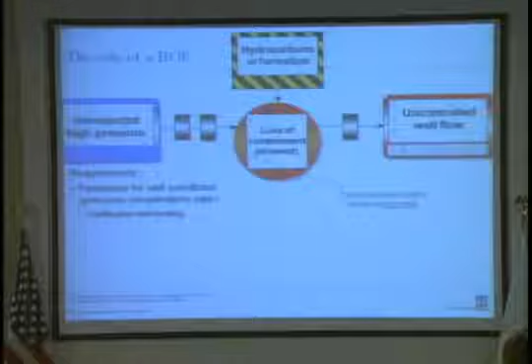In this particular role, and this echoes a lot with what Dr. Hunter was saying in terms of its functionality, what are the requirements in this particular role? Well, for one thing, it has to be functional for the well conditions. So it has to be able to handle the pressure and the temperature and whatever you happen to have in the wellbore at the time, what kind of pipe, what size, diameter, etc.

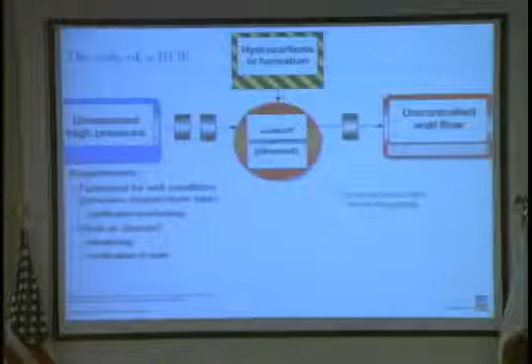And how do you make sure that something like this works? Well, you have to have verification and testing, and a panel later on will be talking about that very subject. It has to work on demand. It sits there for a long time doing absolutely nothing for the most part, and that's kind of what you hope, that you never have to really use it, but when you need it, it has to work on demand.

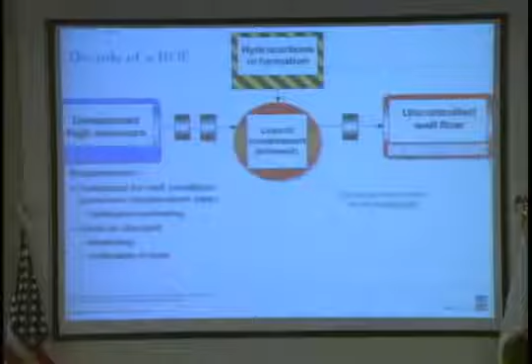That means that we have to have monitoring of it, give it a constant monitoring system. We know what its health is. We have to understand what state it's in. And again, Dr. Hunter was saying, the questions we couldn't answer. Is it closed? Is it open? Is it locked? We didn't know. We have to have a way of verifying what that state is.

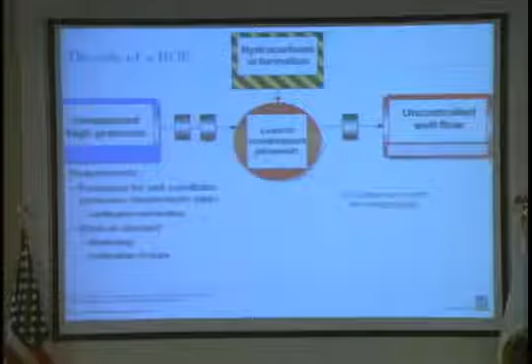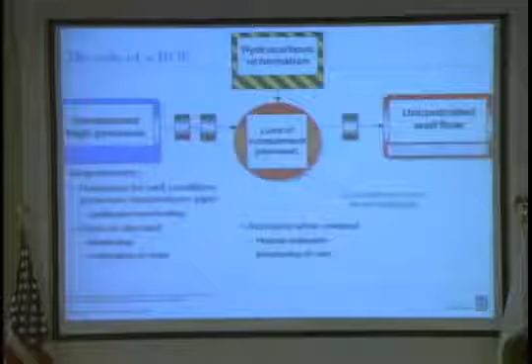It has to be activated when needed. And this goes back to what Deputy Assistant Secretary Smith was saying. There's a person involved in all of this. And there are human elements to the use of this. And people have to know when to use this at the right time. And that includes being able to monitor the well much better so you know when is the right time to do this. And the Sperry Sun data, as you saw, was quite confusing.

And then lastly, there has to be a continuous learning process on this as well, which means that we need to come up with a robust system by which we register not only the failures, which we've typically seen, we need to register the near misses, and we need to register the successes. When does this work? When we asked it to work. That was a success. Let's start a database on all of this, if you will, so we can collect this information and understand just exactly how successful we are with the use of BOPs.

Now, if we then move over to the right-hand side of the bow tie, we can also talk about the BOP playing a role over there. So the top event has already occurred. Now we're expecting the BOP to act as a barrier to basically prevent escalation to a much larger unwanted consequence. But we would argue that this is no longer blowout prevention, because typically we talk about barriers on the left side as being preventative and on the right side as being mitigating.

So we would argue that it is now called a blowout arrestor. It now has to stop or arrest the blowout, not prevent it. It's too late now, the blowout has occurred. Now you want it to take a completely different role. In this case, the requirements change. So again, we have pressure and temperature. We have the question, what's in the well?

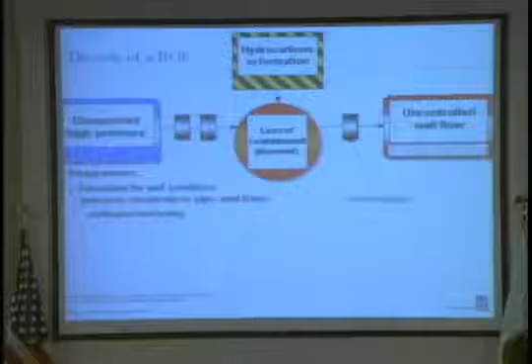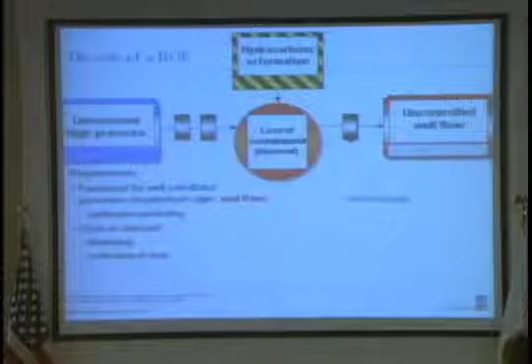Now we have flow. Now we potentially have a well flowing through the BOP stack and the demands that it function there. But again, it's verification and testing that's needed to prove that this is what it's going to do. It still has to work on demand. There still has to be monitoring, a verification of state. Activation when needed. The question mark comes up on human elements.

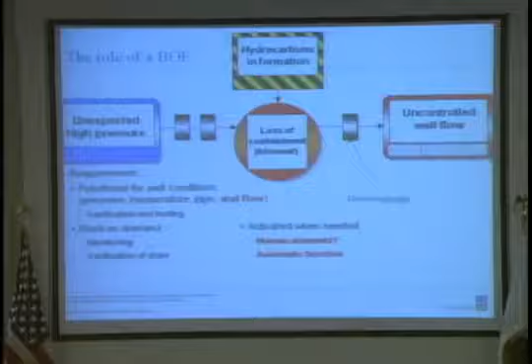As we saw in Macondo, suddenly the human element goes away, especially when disaster takes place at the surface. You can no longer potentially rely on humans being there to intervene and use that BOP in that situation. So you have to consider that. And you have to start thinking about automated functions at this point as well. Really, what is needed to make this work if there are no human beings there to push a button and say activate it.

And lastly, after action learning. And this is adding on to what we've already said in the previous, but what we're suggesting here is to start thinking about black box recording. And I think we all wish we had a black box on Macondo that we could have retrieved, where we could easily pull up and figure out what exactly happened, what buttons were pushed, all those sorts of things. So we need to start thinking about black box recording in terms of after action events have occurred.

So to summarize what we're saying in terms of new requirements that are needed, you have to think of it in two separate roles. You have to think of it as a blowout preventer. You have to think of it as a blowout arrestor. This role needs to clearly be defined. You have to answer the question, where do we want this to sit in the bow tie in order to define the requirements?

And then novel designs require functional specification, not prescription. And this is really echoing what Dr. Hunter said about define what, not how. You need to define what you want something to do, not how you expect it to do it. And we add further that given the fact that we're asking for this to be usable in all foreseeable operating conditions, let's define what that is.

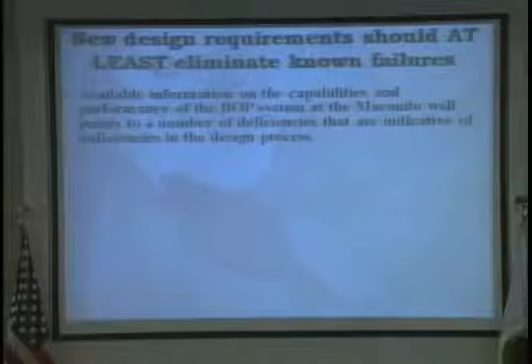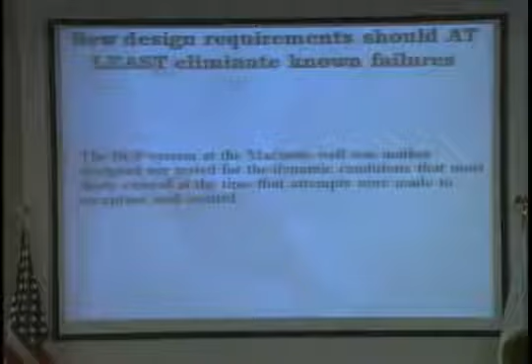So at a minimum, we should be able to anticipate with our current design regulations and incorporate in them all the history we have paid so dearly for by not being prepared for the last disasters. And obviously, what we learned in the investigation of the Macondo well system, which many people have touched on, and Deputy Director Smith did an excellent job of going through, is obviously there were significant deficiencies in the design process of the BOP itself. And most importantly, the BOP system was neither designed nor tested under the conditions it was going to encounter.

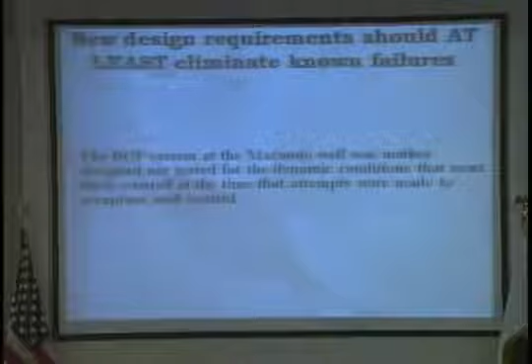And I thought Secretary Hayes hit it right on the head when he says it's got to cut and seal anything that's in front of it. But I would add a caveat to his remark and say it's got to cut and seal anything in front of it when all hell is breaking loose. And there is the tough part. And I think as Mr. Smith touched on earlier, these are very stressful conditions when you have a disaster, especially when you're trying to recapture a well.

Obviously, because of the flaws in the particular blind shear rams, it was not able to shear a set of pipe that was in compression dramatically below its shearing capacity. And obviously, I love the term that Dr. Hunter used, shear certain, which I had not heard before, but I will remember that one.

And you note in quotes I put "under the most demanding conditions to be expected." That is not an original line from me. I will get to the author shortly. In terms of the philosophy of design requirements, I think Mr. Levett and I are on the same page here.

We firmly believe that the design requirements should be performance-based and not prescriptive. Obviously, prescriptive regulations are inherently limiting in terms of technology and innovation. And of course, they often lag the technology because it's tough to change a prescriptive regulation. They're always slow to update. And obviously, as the conditions the regulations are supposed to address change, the regulations are unlikely to pick up.

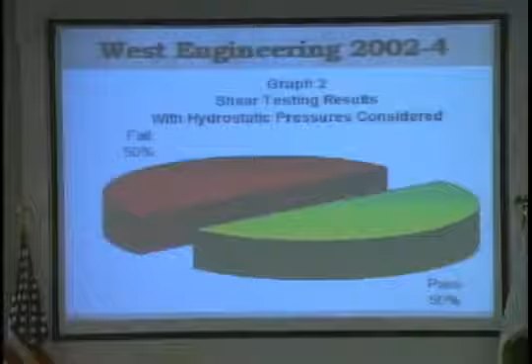Now, if we didn't listen then, we've got to make sure not to repeat that question now. So I hate to disagree with my moderator, Professor Sears, but certainly I was not under the impression these things were robust and reliable. This was my picture of the reliability of BOPs. Now, to my knowledge, if someone did some testing to contradict this, I didn't see it. That doesn't mean it wasn't done, but I'm unaware of it. So I don't think there was a perception.

I think the greater perception, and this is just me personally, was that we're never going to need them anyway, so why spend a lot of money making them even more expensive? Well, in point of fact, the unthinkable did happen, and now it's very thinkable. And obviously, we've got to revisit the worst engineering conditions. Those West Engineering tests we just saw that graphic from were static, no dynamics considered. They were conducted on drill strings centered in the BSR and in tension. They were conducted under ambient conditions corrected for pressure. I'm not critical of the correction. Yet a 50% failure rate under these conditions was observed.

Now, if we do the test and they tell us we've got a problem and we walk away from it, we are going to have a problem again. Obviously, under the new regulations, any test failure, or we've talked a lot about monitoring, but monitoring has got to have consequences if it's going to mean anything. If situational monitoring of the BOP indicates that piece of hardware is unavailable or has a problem, drilling has to stop. That will do wonders in and of itself for the reliability, trust me.

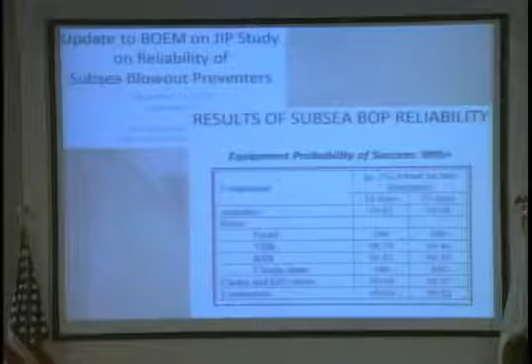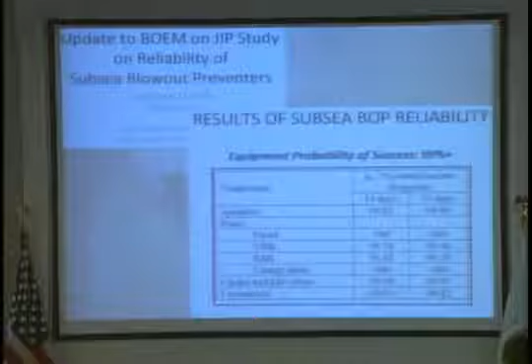Now, more recently, API RP53 presented to then BOEM a JIP study, and note the date of this presentation, September 13th. This is 4 months after Macondo, and yet if you look down at the BSR, we have an equipment probability of success, by the way, that's not my graphic, that's their graphic, of 99.5%. Come on.

Now, at the time West did its tests, it was unaware of any regulatory requirements that the BOP must be capable of shearing the pipe in front of it. Obviously, that needs to be cured. Obviously, there's been no redundancy. One BSR, one shuttle valve, MUX cables independently.

Obviously, the biggest single shortcoming is pipes in compression, not to mention not being able to handle all sorts of pipes that may be in front of it. And as previous speakers have identified, a perfectly designed BOP can be useless if operators don't understand or know when to use it. And they can't be expected under high stress situations to make a complex decision.

And it should be added that, remember, the Macondo well, if you believe 50,000 barrels a day, is a 3.4 gigawatt power plant. Yet the crew sat there for 7 minutes before they punched the button and let 3.4 gigawatts assault their vessel. Now, think about the design requirement if any of these designs have to take 3.4 gigawatts of insult for 7 minutes before the activation is given. That is a terrible design problem. I think we have to get rid of that 3.4 gigawatt requirement.

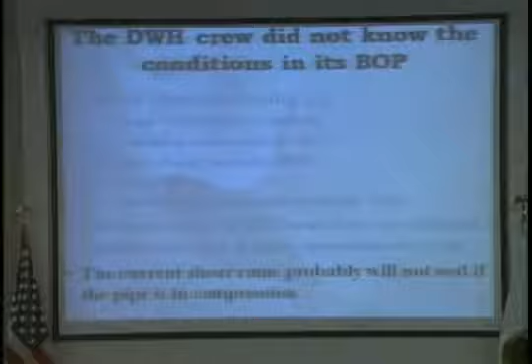Learning about tubes or pipes in compression and not sealing in BOPs is not new news. We've known that for 10 years. So the recommendations here are just those in the NAE report, and you can read them for yourself. The lesson we have to take away is obviously the systems that failed on the BOP that day made the difference between what should have been just a kick instead of a horrendous national accident. And in the immortal words of Santayana, if we don't remember this past, we are condemned to repeat it.

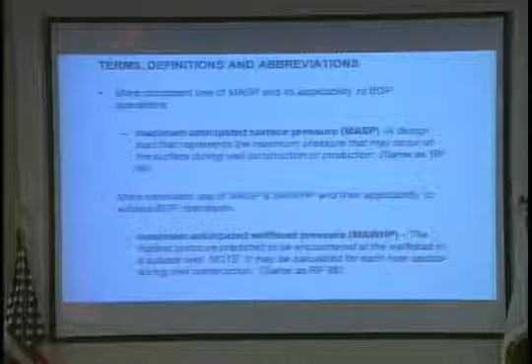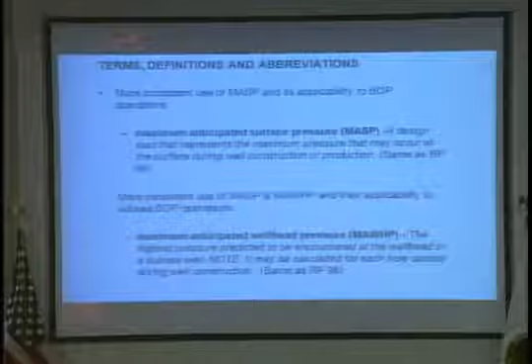Additionally, we took into consideration RP 96, which is the guiding document for the design and construction of deepwater subsea wells. The definition that they had developed would also play part in the way that we used our document. So we took MASP and put it in as a design load that represents the maximum pressure that may occur at the surface during well construction or production.

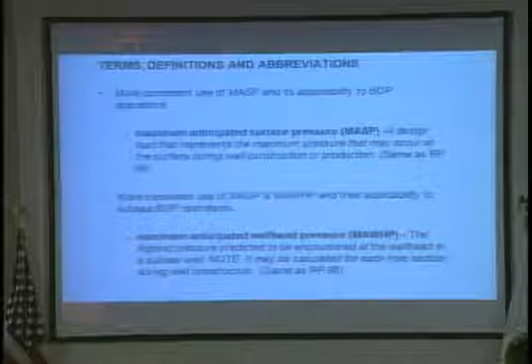Additionally, as part of a subsea well, you would have to look at the MAWHP, and the definition there is the highest pressure predicted to be encountered at the wellhead in a subsea well. Now, this number can be identified in each hole section as well as the full breadth of the well. So during the writing of the document, we continued checking over our shoulder at other API documents and other committee discussions to try to have some level of consistency in the messages that we were writing and the documents we were producing.

There's one new additional definition, and this is the maximum expected wellhead shear pressure, which I think meets some of the discussions that we've seen so far. That is the expected pressure at the wellhead for a given hole condition or hole section, a specific shear pressure requirement, specific operating piston design, the drill pipe material specifications, to achieve shearing at MASP, MOP, or whatever other pressure limiting design value that you have for the well. In addition, there's other points included in this section in surface and subsea that give you more discussion points and considerations pertaining to dealing with the MEWSP.

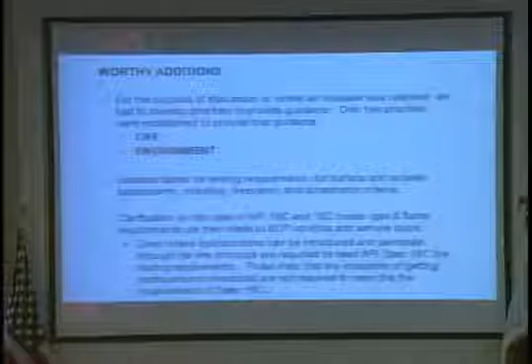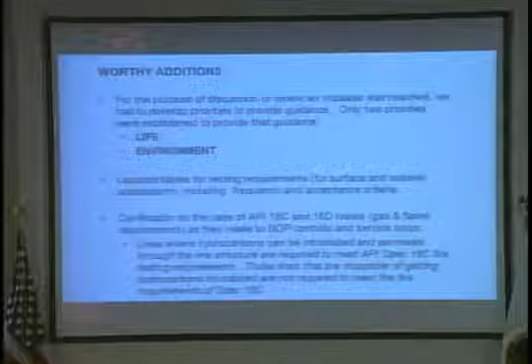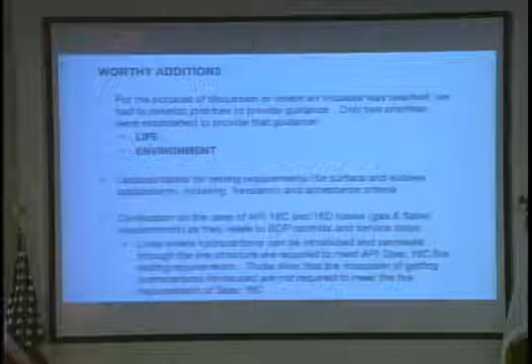We updated the tables for testing, including the frequency and acceptance criteria. And we also clarified the use of fire retardant or gas permeating hoses for control systems, which is 16D, or 16C, which is choke and kill systems. So in this case, lines where hydrocarbons can be introduced and permeate through the line structure are required to meet API spec 16C fire testing requirements. Those lines that are incapable of getting hydrocarbons introduced are not required to meet the fire requirements of 16C. We put that specific language in there because, once again, we didn't say this prescriptively as much as trying to be clear in the intent of what we wanted to document.

Additional testing requirements have been put in. Just one example of it is we added the riser recoil system, which we haven't done in the past, but now it's included into it, and there are others as well. We took in consideration the Joint Industry Task Force equipment recommendations that came to us post-Macondo.

The ROV interface standardization has been adopted. It's now an industry standard for it, and we also adopted the minimum functions that are going to be required to hold the ROV interface configuration. We also included requirements for 20, 25, and 30K systems, defined BOP classifications with regard to well-control equipment, with some relationship given to the pressure.

And again, we considered all the past JIPs and other JITF recommendations that had come to API. They passed them on to us for also inclusion into the document. The last document, we received 281 comments. Approximately 40% of those were technical in nature. We've addressed those. We had the last meeting for the task group on May 18th, last Friday, with the intent of going through and resolving all the comments from the second ballot.

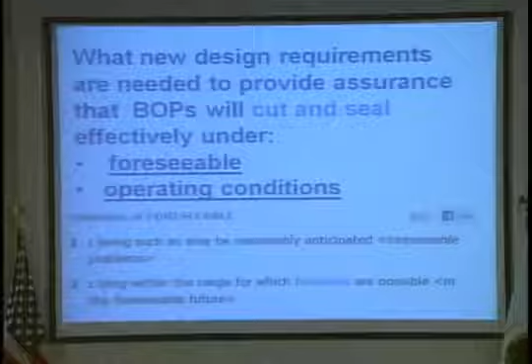I'm here to say, tell them what you want, which is stop it. Whatever it is, you want to stop it. Now, if that requires it to be cut and sealed in the same cavity, then so be it. If you cut in one and seal in the other, I don't think anybody in this group is really affected by that. You just want it to happen. So that's one of the things.

Now, I wanted to highlight this concept of foreseeable. As we get all the information and the forensic knowledge, I think that's very valuable as an OEM, because those are things that we can respond and react to. With this concept of foreseeable, we use phrases like any and all. That's not something that we can convert to tangible action. I think we all recognize what the challenge is, but we just need to make sure we're working through that so that we're using reasonable thought processes around this entire ecosystem that we work in.

Now, I don't know why I moved it around.

Look, the ecosystem that we're in, we recognize we have a very diverse crowd. We have many different stakeholders. This isn't something that's trying to identify all those stakeholders, but we recognize from the regulations, the regulatory bodies, the individuals that do things, the equipment provider, the users, and the information that you use, this is a large ecosystem that we're working in.

And it's something that we need to continue to collaborate on, because I think the majority of us know we're not talking about thousands of these things. These aren't thousands of deep water drilling systems out there. These are in the hundreds. So we recognize it has to be a collaborative approach. We can't put the burden on any one organization or set of groups to do this.

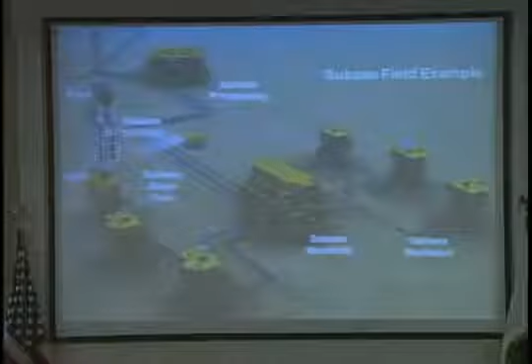Now, I put this one up here just to get everybody calibrated to the complex dynamics that happen below the ocean. So we are focusing just on this element over here. Now, this is a BOP system on a horizontal tree. So this is after all drilling is done that the system shows up. So let's make sure when we're talking about what passes through it, what it has to do, what are the multitude of possibilities, that we address all these things and that we don't just get so myopic in our views.

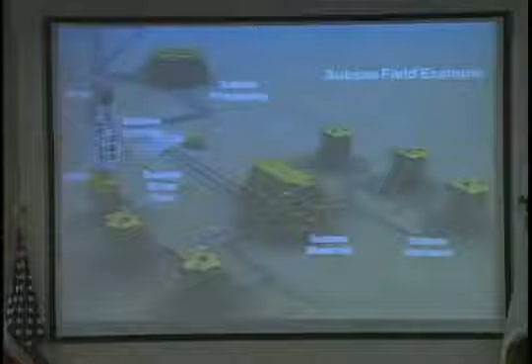So there are many, many challenges out there. As part of the design, as we're looking at this, pressures are getting greater. As it gets deeper, the external pressures get greater, the internal pressures get greater. We even get negative pressures internal to the system. So there are many challenges we need to work through.

Temperatures. We hear things of high temperature wells. Different initiatives are in place for that. This affects metallurgy, it affects fatigue, it affects the elastomer. We have got to make sure that we do elaborate on what this needs to look like, from going completely cold at seafloor conditions to completely whatever the hot is. And hot's an interesting dynamic in this industry.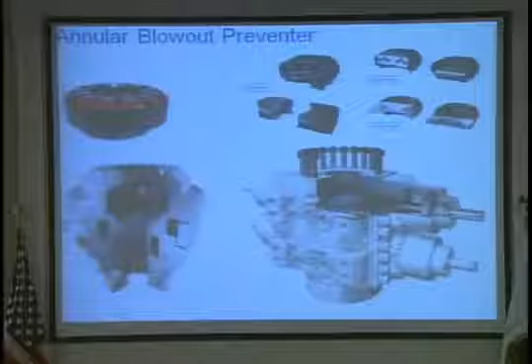That being said, there are multiple tools that we use in the industry. We have the example of the annular blowout preventer, which has different functions that it serves, and we've been really focusing on the ram blowout preventer and specifically the shearing element of it. And so I'll show you some of those things in just a second.

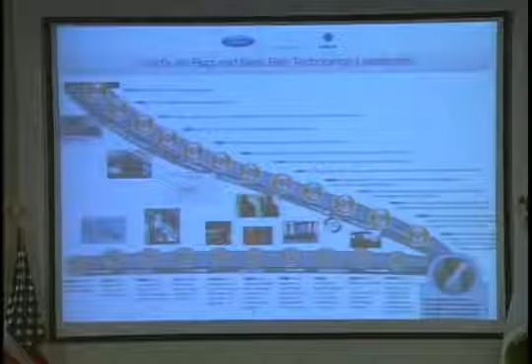Last thing, not last thing on this topic, but quickly moving through, this is just an example of things where you say it is very factual that people want the right thing. This is just the evolution of airbags and seat belts in the automotive industry. We're talking about how do you short cycle this and bring something to market really quick, which means we have to do something unique in the industry.

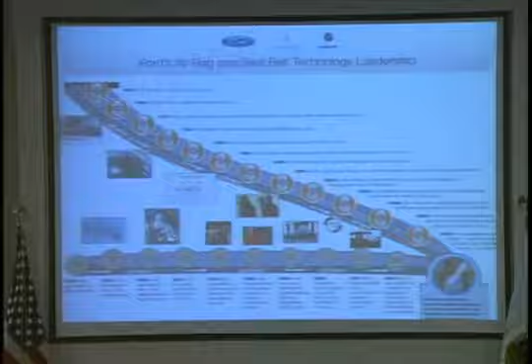Now, I'm going to try to show, this is a thing where I showed the concept of we have a few things that we have worked on based on some of the learnings that we've got from the field. Hopefully this will run.

Uh-oh. Good grief. Stand by.

All right, so this is just things that you can do with the equipment. I'll talk through it a little bit, but this is about how can you utilize the assets best in the field. As we got feedback from the industry, we realized that you need to have equipment that is very usable in many different applications. So this is a little bit of a containment or a response scenario.

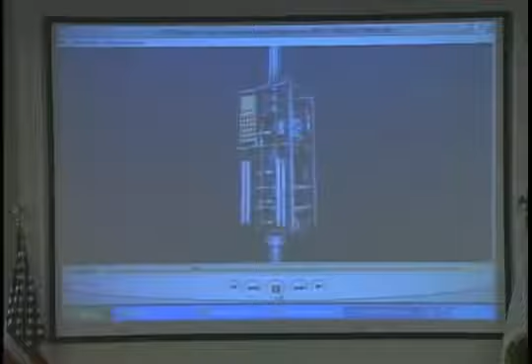This is between an LMRP and the BOP stack. This just shows an example of a disconnect, leaving the stack behind, and then coming with a different vessel with an interchangeable lower marine riser package that you can then bring alongside to engage that system. I'll let it roll, and I know I'm compressing for time. Hopefully you get the concept that the industry is providing solutions that will enable us for this license to operate.

Now, quickly, we talked about data. This is an ROV data display package. This is for a stack that has no power, no controls, where you can visually see the pressure, the temperature in the bore, the position of the rams, and you can get a variety of that information without having any surface control. So again, this is technology that we have out there.

The last video I'm going to show you, and this is very germane to cut and seal. This was at our Offshore Technology Conference. This year we showed this. I'm going to show you a video. I will talk through it, and then I promise I will be done.

So what you're going to see, this is going to be a shear test that we have done. And this is on a pipe that is in a buckled situation. And there's a number of conditions that will show on this. You folks can read it, and then I'll highlight what you're looking at. It's a short video, I promise. It's a minute and a half.

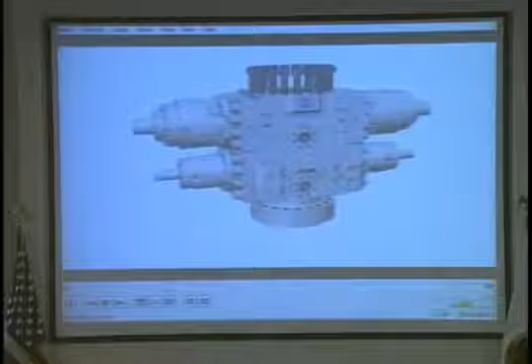Okay, so what you're looking at in this side here, this is a pipe, and we're going to begin to buckle the pipe. The pipe is now hard over to the side, and then we're going to engage the new shear blades that we have that fit in existing cavities. The point here is the system is hard over. The pipe collects it into the shear plane. You'll see it bring it over. At that point, it brings it in.

Now, this is an offset in tension or in compression shear. So it is showing that the industry responds to forensic information that's given to us. This is something that we need to continue to encourage and engage in the industry as part of these committees.

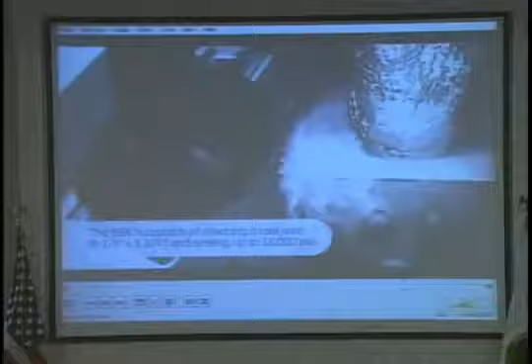This one is just, now we understand we play globally. This was a requirement for a different operator to shear in a region. Now this is then shearing an actual tool joint. This used to be considered an unshearable. With this new device, we're able to cut and seal tool joints. Now, it's not everything that we can cut and seal, but we're improving what the capabilities of the equipment are.